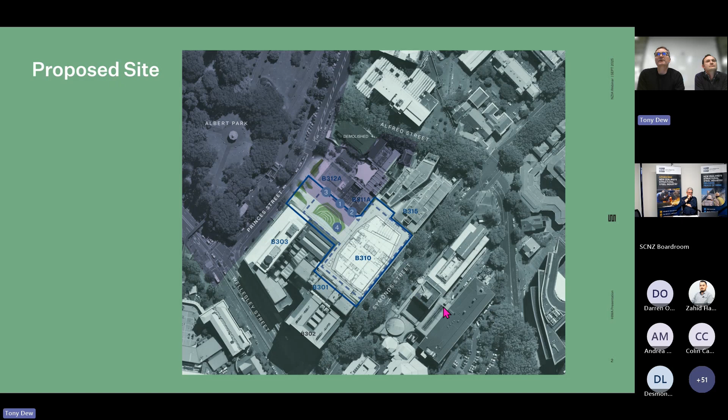So thank you all for letting me present this great project. It was a 6-year journey for me, from when I started at pretty much PD to the end of the project last year. For those people out of Auckland who are not quite sure where the project is, this is the Auckland central campus. You see in the middle of the screen here is pretty much where the old rec centre was. We demolished that and have built in the same space. The old quad is still remaining there. Student buildings are over in this hub. It is pretty much a central part of the campus.

Just a bit of the timeline. So we won the RFP in 2017. It took us a couple of years to get documentation together. And then in 2019, you can see there, D&H were engaged as part of that early documentation to help the process. Maybe I'll just mention something that was a bit unique with this project: we were engaged directly by the University of Auckland rather than the main contractor Hawkins.

The reason for that was early subcontractor involvement, so that we could work with WAM and Beca on developing the design before they'd gone too far. So we were involved in 2019 and then got novated over to Hawkins, the main contractor, about a year later. Yep, we can see that there, 2020, novation across, first steel orders were put in. 2021, we started the journey on site.

2023, the last of the steel superstructure was completed, and then the project came to an end towards the end of 2024, and the building was pretty much handed over to the university for the start of 2025.

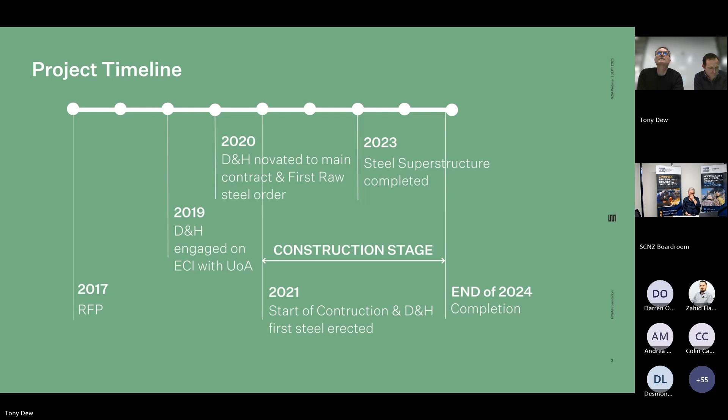Just a few fun facts. So on the right side there, it's about 40,000 students at the university. Probably about a month after we opened, they saw 5,000 students come through the gates in the first weeks. The GFA, 21,600. That's over 9 levels.

The pool tank, which was one of the interesting parts, is a 34 by 20 metre pool tank. Stainless steel, so the whole pool was fabricated stainless steel. The show court has 1,500 seats. That show court has a glass floor to allow LED lights to show the court lines, and then we have a second court, which we call the practice court, which is a more traditional timber floor.

And then some tidbits for Richard. Yeah, I mean, it was clearly a pretty impressive structural steel project. I remember this morning, and I didn't put this up here, that the average weight of a piece of steel that was erected on this project was a tonne. And so that's well off the normal metrics.

But on top of that, there was about 6,000 tonnes of fabricated steel in this project, all fabricated at D&H in Auckland. 85,000 structural bolts went in to put all the connections together on site. Obviously, a lot of site welding as well, which I'll get into a bit later.

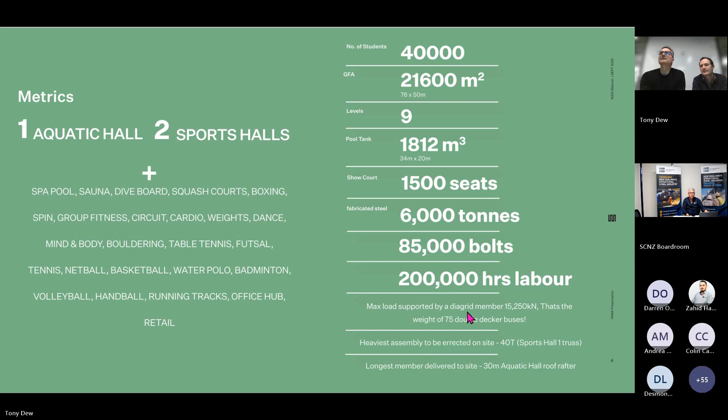Thanks. We've got a little freeze on our presentation. Stuck. Classic. Slight technical difficulty. Yeah. Here we go. We can use the mouse instead.

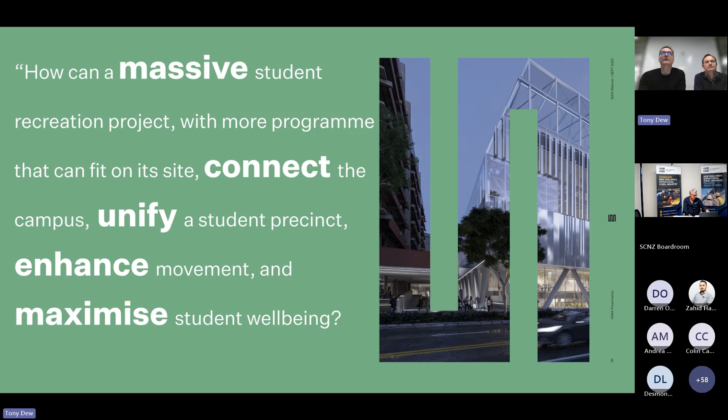So here's just a little bit of a snap of a quote. I'm not quite sure, to be honest, where this quote came from, but the main highlighted words there are pretty much what drove the design here. How can we connect, unify, enhance, and maximise, more importantly, the student wellbeing? And that was pretty much the driver for the whole project.

Now I'll just dive into some more design drivers. Obviously, massing, the visual connectivity from Symonds Street up to Princes Street at ground level was very important. Then moving across, just enhancing those connections and the edges, and obviously the surrounding buildings. And then most important for the students is just the circulation and public access from Symonds Street up Princes Street to Albert Park.

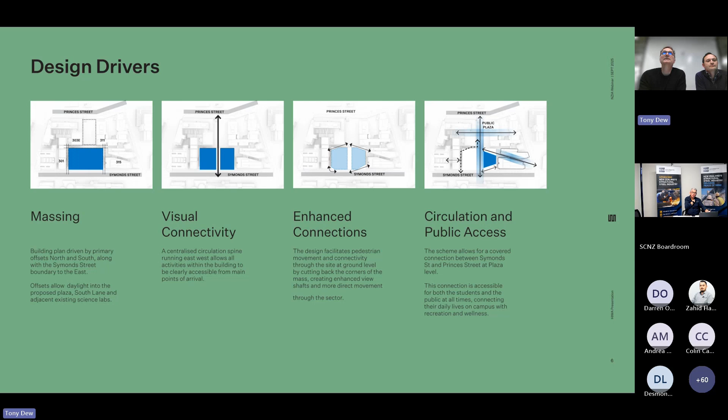Obviously we had some height controls, and then because of that huge program that we had, just trying to fit all of the wishes of the university, we decided to lift the show courts off the ground, and I'll go into a bit more further along why that happened. Again, optimising the height restriction lines and a few other things. We split the show court. There was some other internal reasoning behind that.

Then the formal facade. So here you can get to see why the diagrid came about. So from those initial ones around the edge treatment and the visibility, you can see how that massing is starting to come through. And then finally, down in the main corner of Symonds Street, clear address of the entrance point.

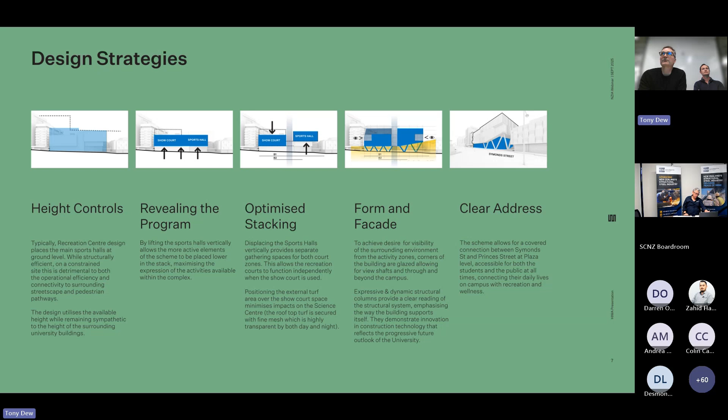Oh, yep. Now into some of the planning quickly, design planning. So this is the lower level, so B2. This is actually underneath the pool concourse, so you can't quite see that, but that is the stainless steel pool and the buttressing that holds the pool. We have full access around the pool, obviously for maintenance and just general.

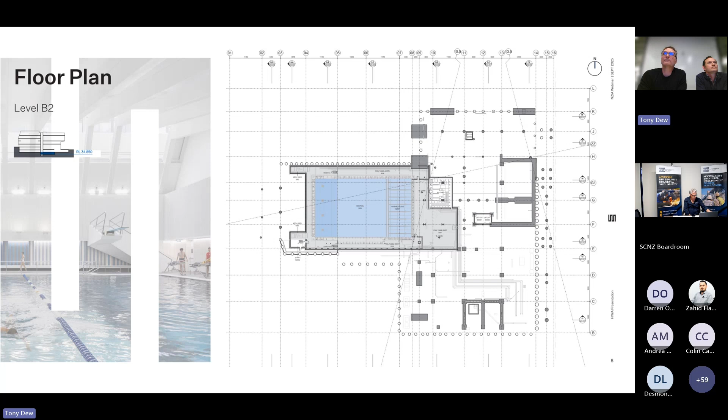That's in competition mode, so that all the judging and staging can happen at the end of the pool. And then obviously you lower the floor to whatever height you require for aqua aerobics, water polo, and a few other things happening down that end.

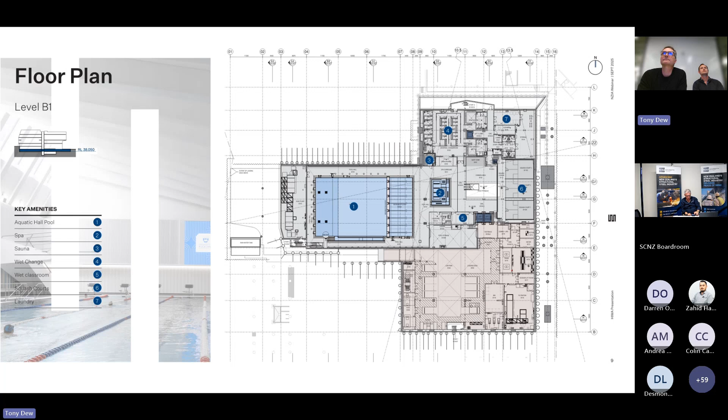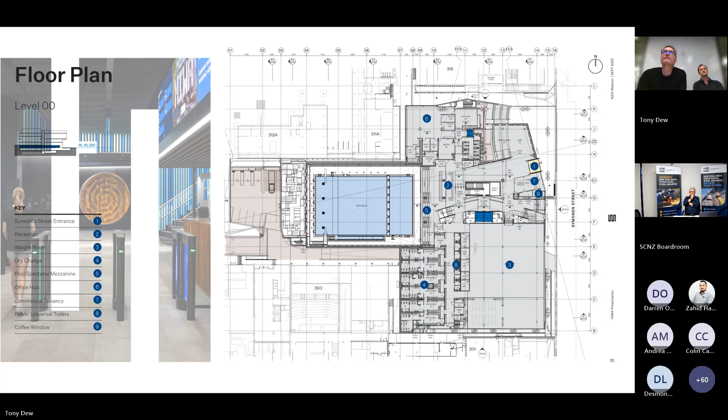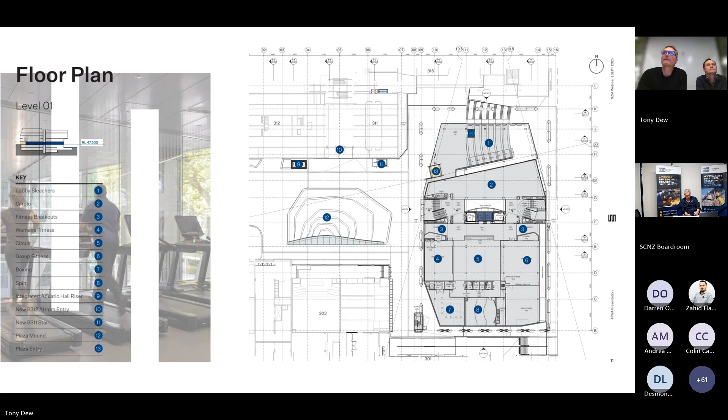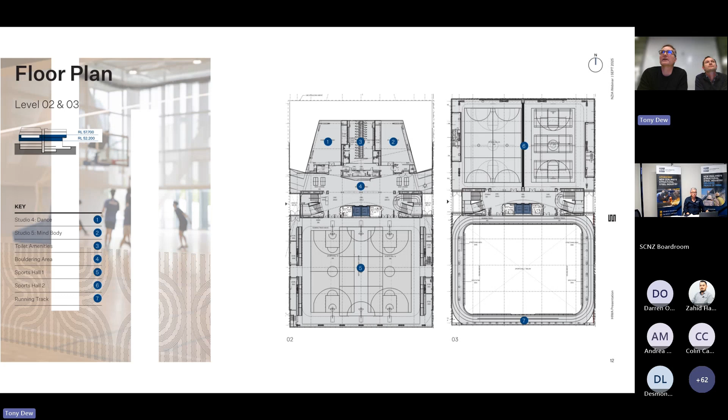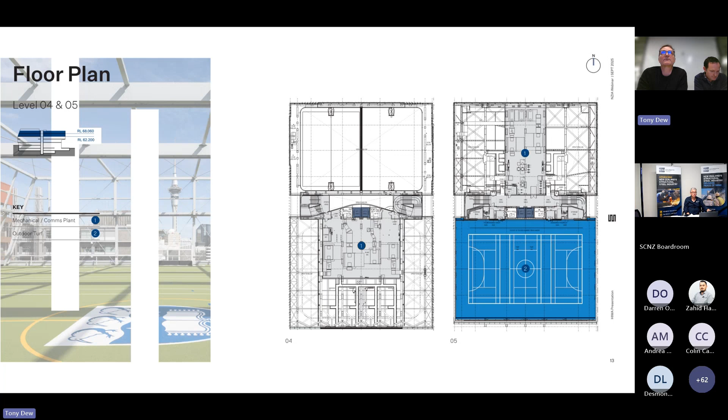Number 1 on the left is plant room that sits above the sports hall. And that repeats to the right. And then the blue area is the turf court. All of the images to the far left sort of reflect the finer photos of what's happened on site.

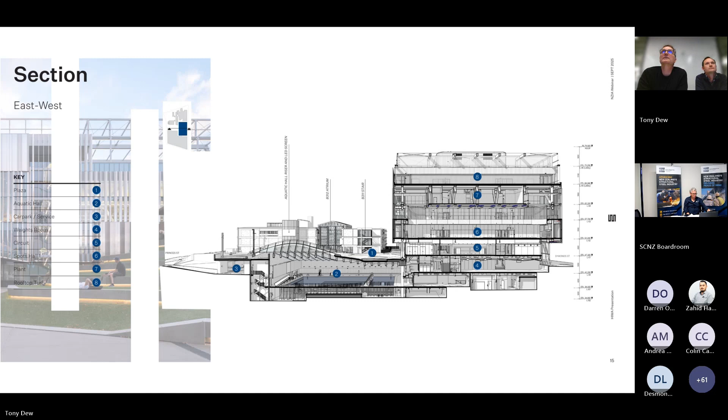Thanks, Tony. So yeah, I'm going to talk really through sort of three main parts, features of the project, being these diagrids and mega braces. I'm going to talk later about the long span trusses that supported the roofs to the sports hall, and then also Tony mentioned about the aquatic centre pool and the roof structure to that, all of which were in parts or mostly visible structures. So they all had quite a lot of focus around achieving the architectural vision.

So I'll start with this diagrid and mega braces. We didn't use the word mega braces lightly. These were the members I mentioned before that were supporting 75 double-decker buses worth of load coming down each of these diagrid members. That'll be under a seismic event. So these mega braces are sort of a dual function. They are columns that are supporting the overall structure in the sports hall floors, but they are also the load resisting system for seismic and wind.

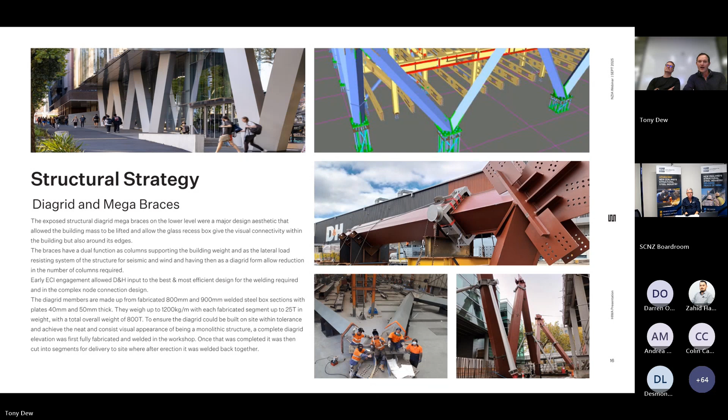Move on to the next part of the structure that I wanted to talk about. So sports halls. Tony mentioned before, these sports halls were lifted off the ground. That was mostly through that use of having that diagrid structure. But of course, the sports hall space is a large open space, and structural steel was the ideal material for that because it's extremely strong and surprisingly light for the amount of strength that it can handle.

And so Becker designed these long span trusses. These are about 30 or 36 meters long. They're about 5.5 meters deep. The depth of that truss enabled a partial floor to be built on the lower chord of the truss, where most of the plant and services, if I remember right, could be positioned, which is out of sight in the building. And also the depth of that truss itself being 5.5 meters gave it some structural efficiency.

Once they were delivered to site, we pre-assembled them on the concrete sports hall floor in the vertical position and used the 2 tower cranes on site, which were, I heard, the largest tower cranes in Auckland at the time, so they're not small. And through a tandem lift, which is when you can connect and lift up a member simultaneously, we lifted these 40-ton trusses into position, and there were 5 of these above each of the sports halls on either side of the building.

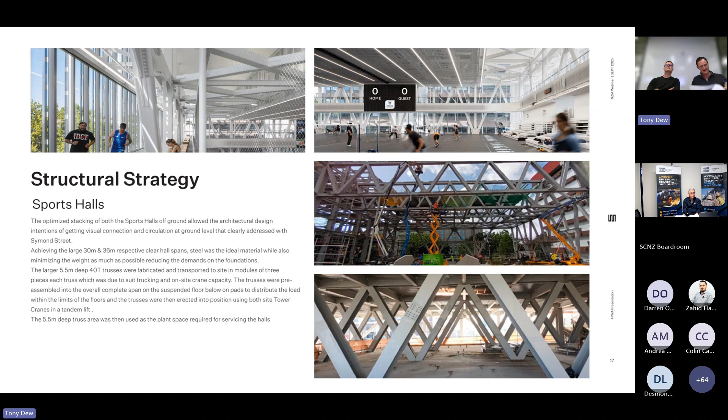So these members were 30 meters long, and they had an ever-changing crank in them. So 30 meters long, but they cranked at about the halfway point so that they could follow the plaza mound shape that it was supporting above. And if that wasn't tricky enough, the member itself, just to give you an idea of size, is 1.2 meters deep and 0.4 meters wide. And again, in some ways not dissimilar to the diagrid. These were fabricated from 4 plates and welded together at the 4 corners.

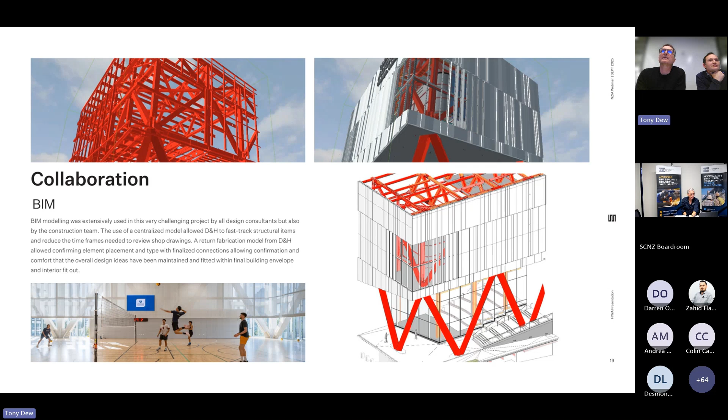How are we doing for time? We didn't actually do a time check. Good. I reckon you could show the time lapse.

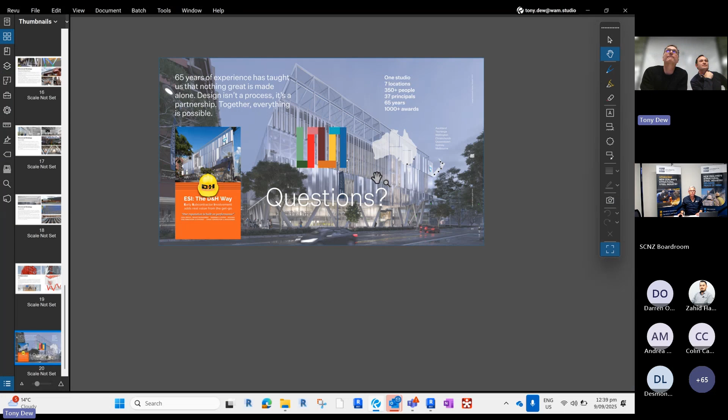Yeah, so before we jump into some questions, I do have a time lapse that shows the site under construction and beautifully goes through that steel manufacture.

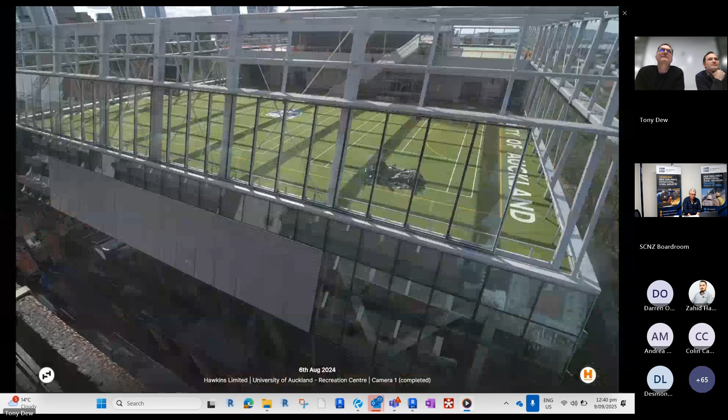So this is from the webcam that was on site. I didn't record it that well, so it sort of ends and then goes to the start. Here we go. So there's digging the hole, getting rid of the old rec centre, prepping the foundations for the steel to come. See, we started from north, headed south.

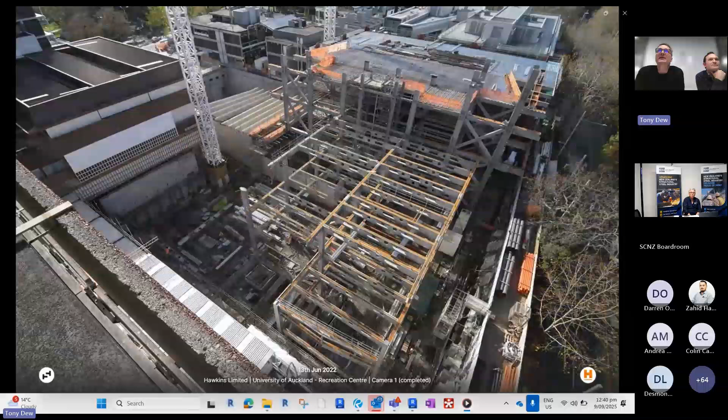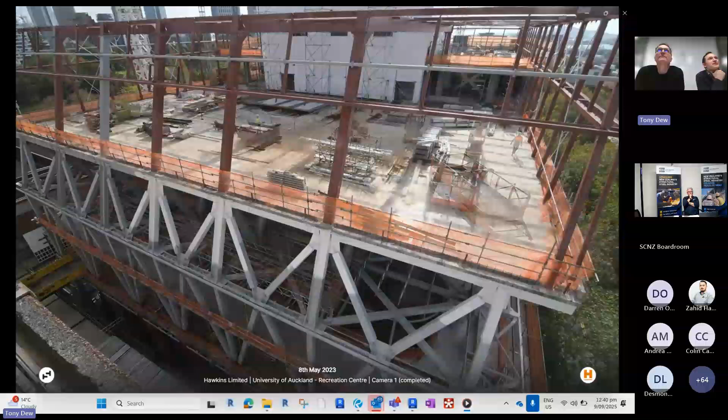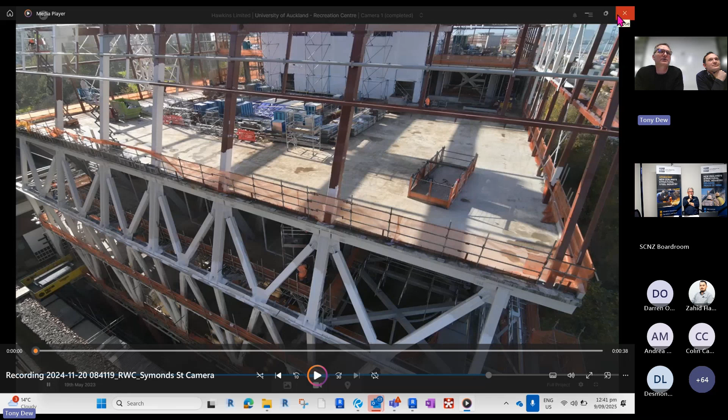That's those sports hall trusses going up there. That last piece is the turf roof, which we didn't talk much about today. Yeah, I guess we're just going back to those large spans. So we did not want in the visual sightlines to have any large plate connections, which is why we forced these guys to look at doing these large span deliveries so that we didn't have any gusset plates in the middle. We just had beautiful, clean, sharp beams, and we managed to achieve that everywhere, basically.

So that turf roof, no gusset joins in the middle of the court. The trusses, obviously, we hid quite beautifully with some ceiling, but in the pool, again, no gussets there, just some beautiful, clean line beams. So, are there any questions?

Oh, can you hear me now? Yes. Oh, yeah, there we go. Yes, sorry. I do have some questions. There were a couple of people who asked similar questions. Keep the questions coming through, people. We've got a bit of time.

Were there any sustainability targets such as Green Star points targeted for this project? Architecturally, no. Because of the material choices, and it was a request by the university not to do a Green Star, we did look at doing a WELL, but the WELL rating was more around the... Obviously, Warren and Mahoney hold strong opinions and directives around being as sustainable as we can. So obviously we designed as hard as we could to achieve the best outcomes.